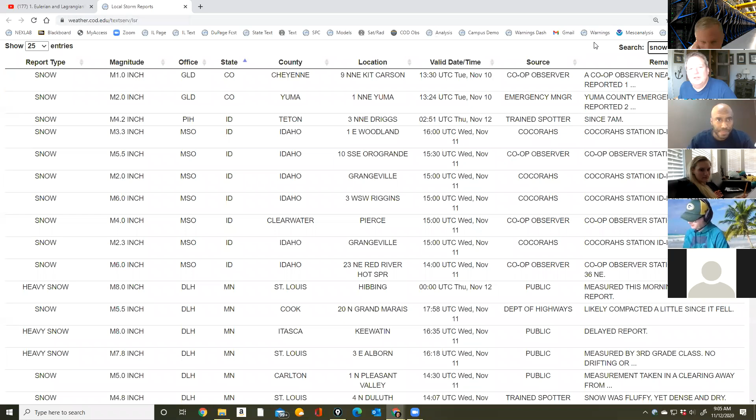Before I get into this, I wanted to show you something Mike Zaransky just did. This is the coolest thing ever - it's called local storm reports. Mike has recreated this page.

Let me show you. He's recreated this page - you know how we have a warnings page that looks like this? Have you seen that one? Yeah, this one is a local storm report. So instead of always going through the weather service to get local storm reports, now we have local storm reports in real time.

So we can actually monitor this page and watch what reports are coming in. Here I've got non-thunderstorm wind gusts, snow, flood, heavy rain - these are all LSRs, tropical storm. I saw one I didn't even know existed.

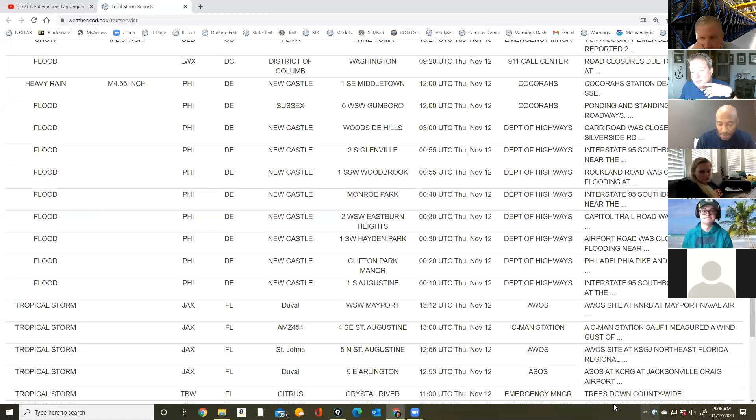So the page will auto update? It updates every 2 minutes - storm surge, tropical storm. There's one, let me look for it, and then you can search it.

So if I need to find debris flow - there's a debris flow warning coming out of Puerto Rico, I guess, and Virginia. Yeah, I've not seen that one before. I didn't even know they had that.

But let's say I wanted to see what happened in Illinois the other day. I go to Illinois, and we have it ordered - we can arrange it by state. So we can see thunderstorm wind gusts, 61, 66, 64.

That's all Cook County. So if I said, well, let's see what's going on in DuPage County - let's see what they had. As soon as you type in the search bar, it'll tell you, okay, we had 4 severe thunderstorm reports: Woodridge, York Center, Carol Stream, DuPage Airport.

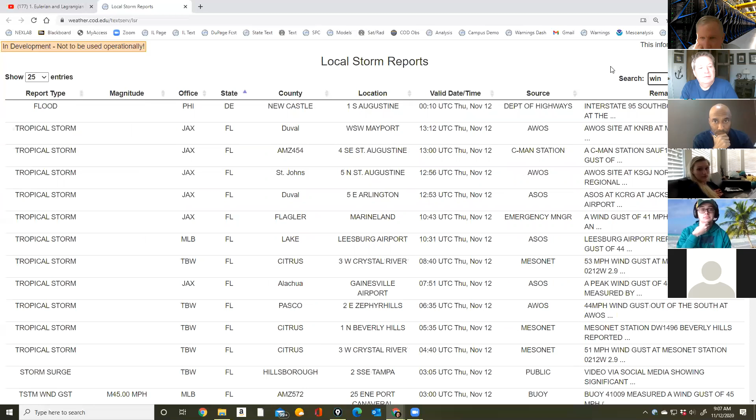Come on, don't tell me that's not cool. It's cool, it is nice. Winnebago County - that's actually really cool. I'm telling you, this is what we've wanted for so long, and Mike finally was able to do this. So we have some amazing stuff with this.

So if I wanted to see tornado reports, rather than going to SPC to see the dots - and we can create an image with these things in there as well eventually - but if I wanted to see tornado reports that have come in recently, Davenport office had a bunch. It looks like it's all the same tornado, but they did have a tornado.

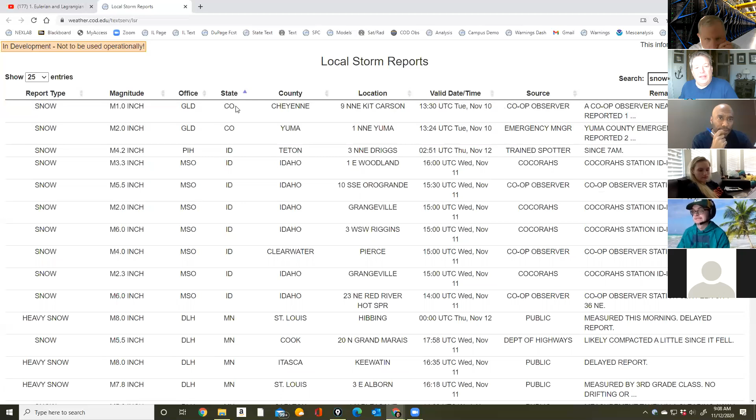This would have been in Mercer and Rock Island County. So there it is. But if you say, oh, I want to measure snowfall, let's say we're doing it for Illinois - I can do it by state. Okay, here's Idaho. So then you're looking at this, and you will always see snowfall reports coming in by state. And we would do the same thing for Illinois.

So if you want to monitor reports, rather than going to our text page where we have to search every single text product and go, what's that say? Oh, that's not the one - that has driven me crazy for years. And now it's all gone.

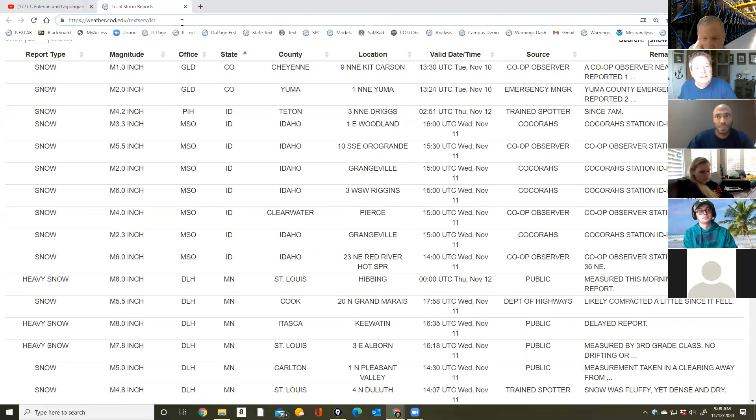So if you want to write this down, I can share it with you. Are these the same reports that go down to SPC or show up on SPC's page? Yeah, these are - let me show you. I'll give you this. And if instead of LSR, you do SVR, then you get the same stuff that we have with just severe thunderstorm and tornado warnings.

And I think we have one where we include floods and any warnings currently going on. So we have a lot of these pages that are great ways to monitor. We're just waiting to get it done - it's taking a long time to fix things.

So, let's see, what else did I want to show you?

On the text page, the way you did it before, Jim, is you'd go to the National Weather Service forecast pages, go to information, and then local storm report.

Sometimes they'll come up with this page where they summarize it, but it's fairly random. Most of the time, at the bottom of this... no, hold on, this isn't working quite right.

If I went to local storm reports, then at the bottom of the page, you'd see 'go to previous bulletins.' They would come out with one report and you're like, okay, that's not it. You'd have to search each text product to try to find where it is.

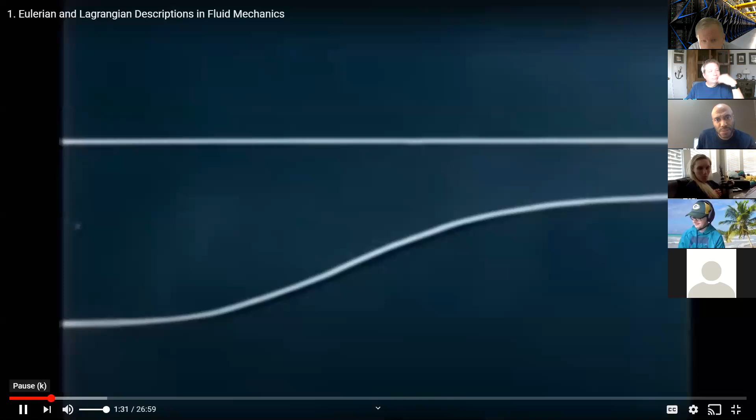So in here, what's going on is you've got deformation, right? This is deforming the fluid. So they start as little squares as the fluid must go into this smaller tube. Okay, so we're not going to worry about the deformation of it.

So instead of using squares, what are we going to have to use? What will be necessary? Vectors? Well, we'll use vectors, but you have to consider it as points.

In this flow of water through a contraction, hydrogen bubbles have been used to identify pieces of fluid so that we can follow their motions. These pieces are quite large, however, and we would like to examine the motion of very small, infinitesimal bits of fluid. Therefore, it will be more convenient.

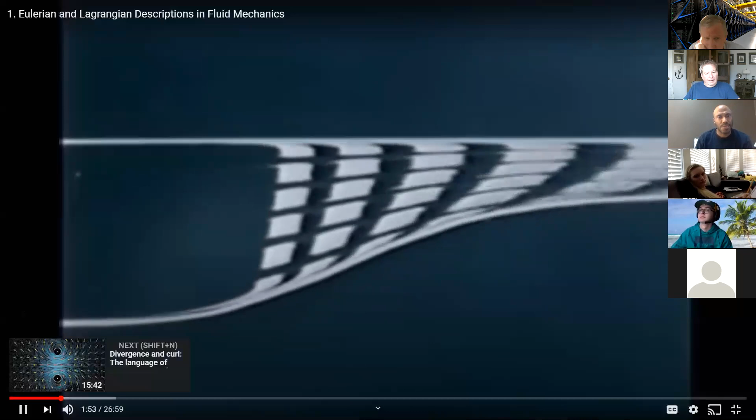One thing to keep in mind too is, do you see the shape of this square? It actually is doing something like this. It looks like that. What is this? What does this illustrate? It does the same thing up here.

What is that deformation a result of? Oh, viscosity. Right? It's viscosity. That's what's happening. So you have incredible amounts.

If you looked at a zoomed in area, you'd have incredible amounts of what? What does viscosity result in? Stretching? Well, it does a little bit, but what is it resulting in here?

Shearing? What does this illustrate? Over here, it's shear, right? So viscosity creates shear.

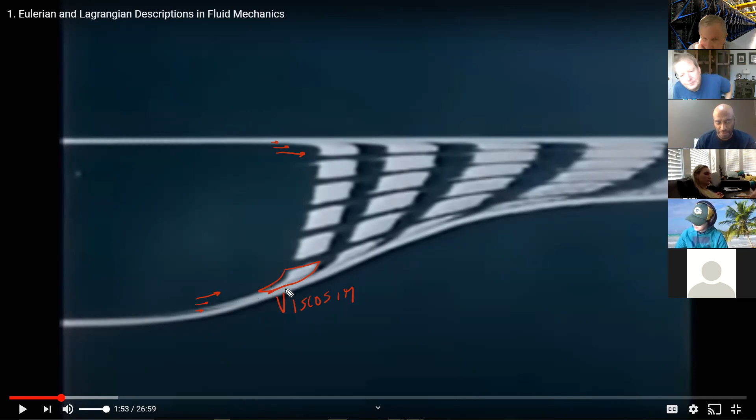Shear results in what? Vorticity? Vorticity, right? So if you think about what's going on in the surface boundary layer, you are talking about huge amounts of vorticity that's generated.

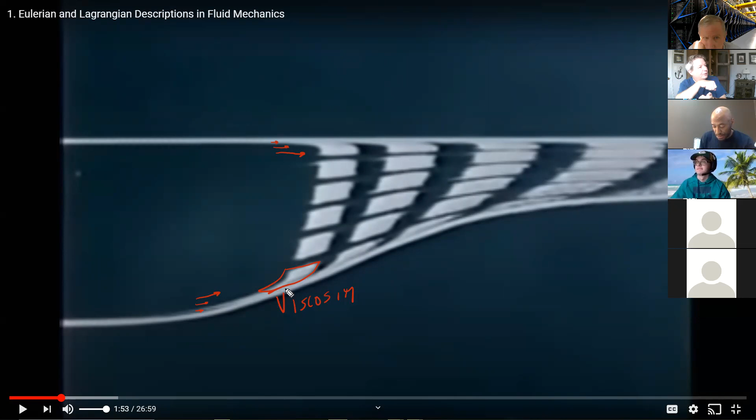So whenever you watch leaves flowing, you'll see these swirling leaves. That's all because of viscosity due to the boundary layer. So I just wanted to point out some of the things that you should note about life in general.

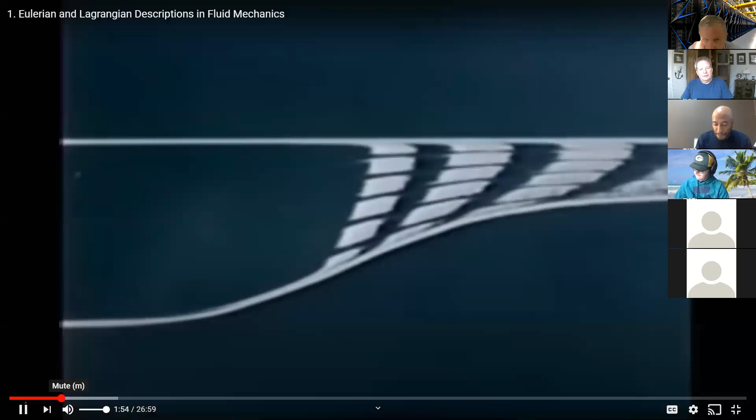Describe the motion itself. The description of motion is more convenient to have a computer simulate these motions and generate the visual displays for us. We will use open circles to identify material points.

Now let's think about this. What was the word he just used for these open circles? He called them material points. If something at this point changes over time, then we would write it this way, because it's a material point - it becomes a total derivative. And it's a total derivative, meaning it's following a point. That's where we get this idea of Lagrangian.

Following the parcel - this time it's a point. They will use closed circles for the local derivative, right? Which they call... what do they call that? They call it a laboratory point. That's the word I'm looking for. Laboratory point - it's fixed in space. And so here we would use d-something, d-time.

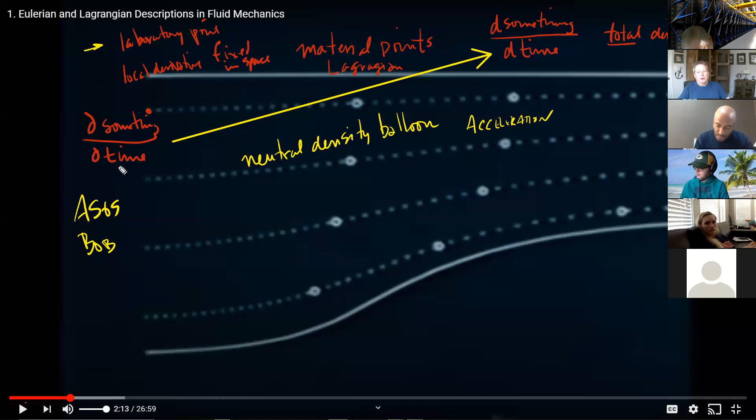So we are going to measure everything in laboratory points. And what really matters is the parcel has to have forces - it's the parcel's change that matters. Because if there's pressure or a force on the parcel, do you agree that's going to cause an acceleration? And that acceleration is going to move the parcel in different directions. So I need to know how to get this, but this is what I measure. Does that make sense? I measure the laboratory points, but I need the information from the material point.

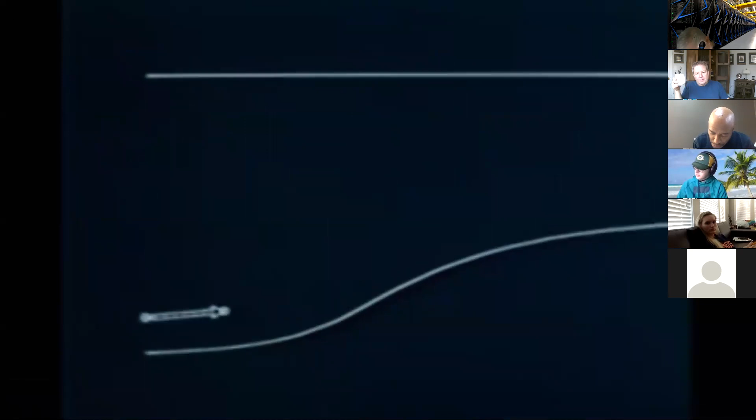And that's what this movie is all about - describing the position of a material point as a function of time, using a vector drawn from some arbitrary initial location to indicate the displacement. Do you understand what they've done here? This is an open vector. This open vector is actually the material point's vector. The only difference is, where are we placing that vector?

We're placing it at a fixed point. So this open vector is the force or the velocity or whatever vector is associated with a material point, but placed at a fixed point.

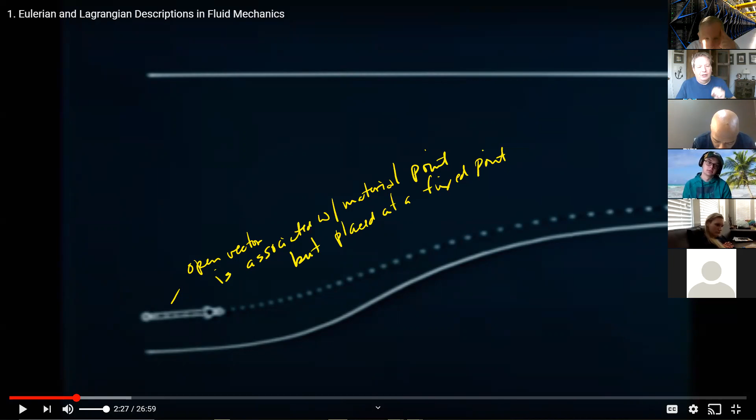Does that make sense, guys? Do you understand what I'm saying here? Yes or no? Because that's the instantaneous measurement, right? It's the measurement of the actual point, not the location - I'm just putting that vector at the location. So watch what's going to happen at this point.

We will use open vectors, as here, to indicate velocity and displacement relating to material points. In a given motion, we can compute the velocity and acceleration of such a point at each instant. Here we indicate the velocity by a vector attached to the point. In a continuous fluid, we have an infinity of mass points, and we have to find some way of tagging them for identification. A convenient way, though not the only one, is to pick some arbitrary reference time, which we call the initial time, and identify the material point by its location at that time.

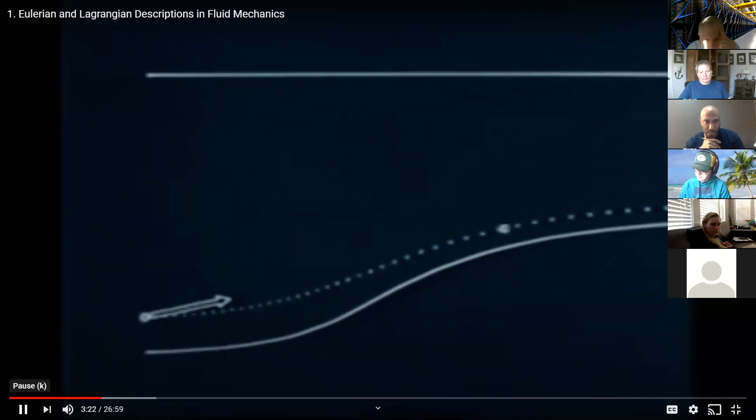Mathematically, we would say that the velocity is a function of initial position and time. So that's the open vector following that point, displayed at a fixed point. To accord with this description, we have shown the vector attached to the initial position. We could show the vector attached to the moving point, or use both.

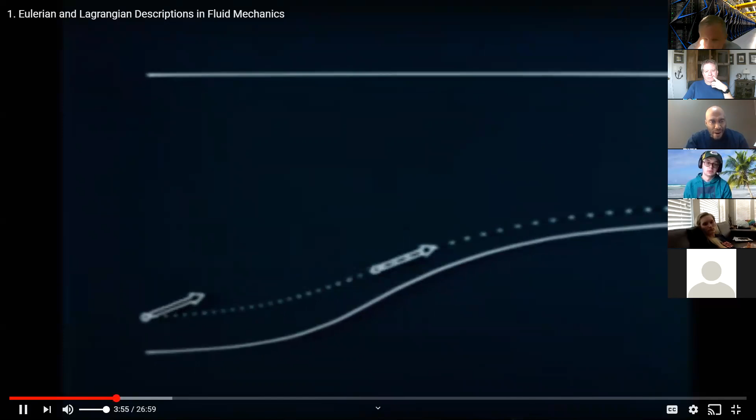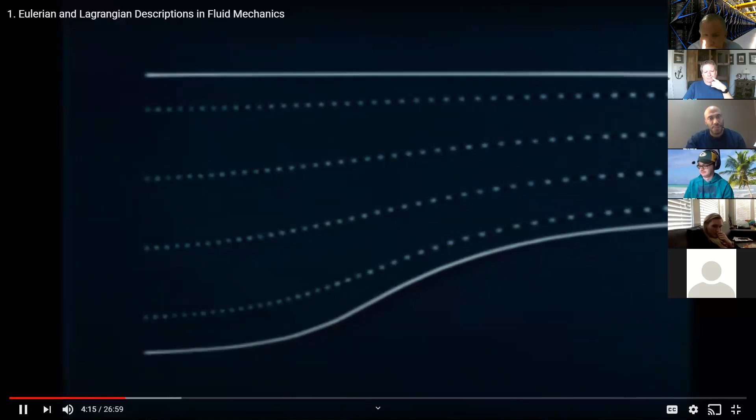If we were displaying the motion of a group of points like this, whose vectors do not interfere with one another, to display the whole motion, and in more complicated situations, we avoid interference by showing the vector only at the initial location. To describe the whole motion, we would have to give the velocity of all the pieces of matter in the flow as a function of time and initial position, like this.

Okay, does that make sense? Do you understand what they're doing? Now, I've seen this so many times, it makes more sense the more that you watch it. But I'm just showing you all the different points, because how many points exist in here? Infinite. An infinite number of points. And I'm just choosing some of them and representing a vector of what that point does later.

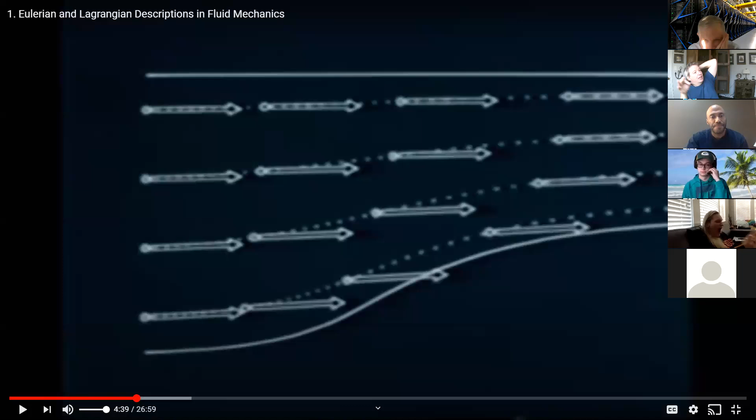So he says the velocity is a function of its initial location and time. Make sense? Because where it is, these arrows are not all the same because the initial velocity was different when I started this thing.

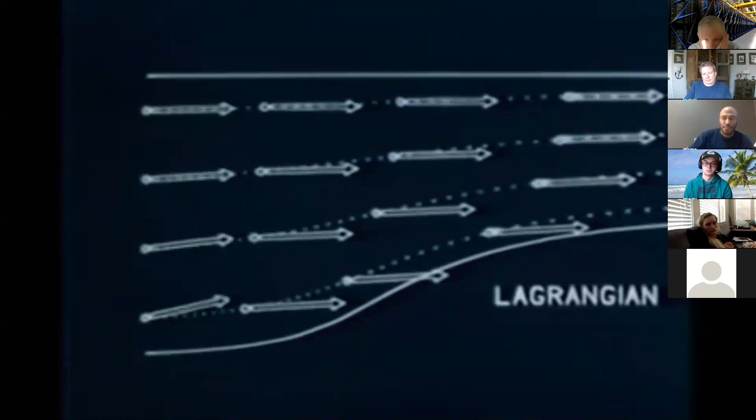This description in terms of material points is called a Lagrangian description of the flow. Such coordinates are called Lagrangian or sometimes material coordinates. From the Lagrangian velocity field, we can easily calculate the Lagrangian displacement and acceleration field. We can imagine attaching an instrument, like a pressure gauge, to a moving point to make what we might call a Lagrangian measurement.

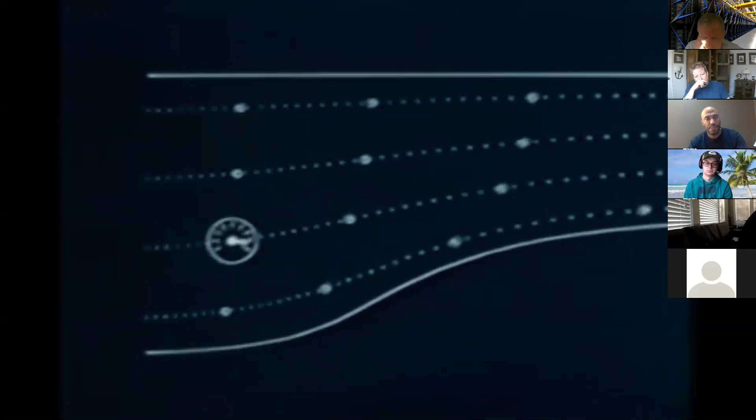This sort of thing is attempted in the atmosphere with balloons of neutral buoyancy. If the balloon does indeed move faithfully with the air, it gives the Lagrangian displacement. Lagrangian measurements are actually very difficult, particularly in the laboratory.

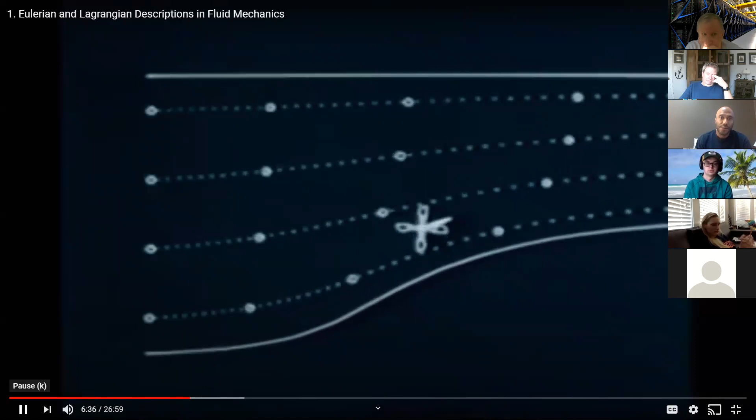We usually prefer to make measurements at points fixed in laboratory coordinates. Classically, the idea of a field, such as an electric, magnetic, or temperature field, is defined by how the response of a test body or probe, like this anemometer, varies with time at each point in some coordinate system. Here we are probing in laboratory coordinates. We will always indicate such probing points, points in a coordinate system fixed in our laboratory, and the velocities measured there by solid points and solid arrows.

Okay, you guys follow that? But I didn't quite hear all of it because of the weird distortion from watching it through a screen share. Oh, okay. How about the rest of you? Were you able to hear most of that?

Yes. Okay. So all he's saying is that we now have laboratory points, right? So in meteorology, what do we say? The world is our laboratory because we're dealing with the entire atmosphere. And we put sensors every place in that laboratory. And that's the words that they're using to describe the fact that we're taking measurements at fixed points.

All right. Now let's get into the math of it all. Here is a grid of points fixed in space. We show the velocity at each point. By the way, a gridded laboratory fixed in space. Anybody want to tell me what we are describing here? A gridded laboratory?

Model. That's a numerical model, isn't it? We collect data. We do something called an objective analysis. We find ways of taking data points and assigning it to a grid. That is an initialization of a grid. And there's a lot of research, there's a lot of stuff you would do in modeling that talks about how that happens. But you're basically saying, I'm going to take these temperatures and I'm going to assign it to a grid. And there's methods to do that.

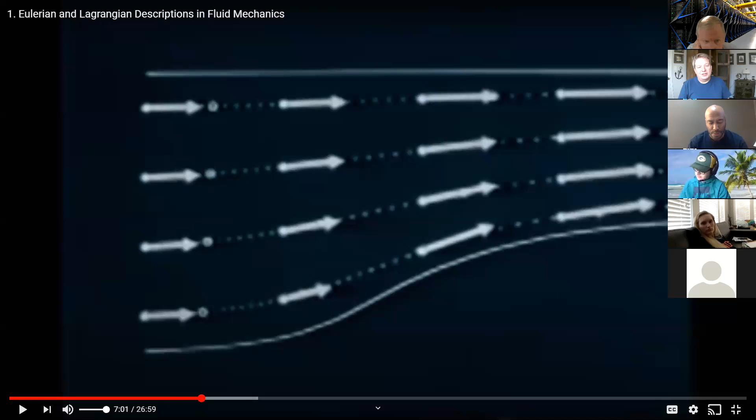Would you agree that all modeling has an initial error because it's not exactly precise? We don't have extreme precision in doing this, therefore we have an initial error. Chaos theory says eventually that error will take over and the atmosphere becomes non-predictable. If we ran the NAM with a perfect grid, with perfect precision, we'd have a much better model, but we don't do that. That would be a really interesting way, if we could put a grid equally spaced everywhere of exact precision. I wonder if our models would get better.

A description like this, which gives the spatial velocity distribution seen by a probe in laboratory coordinates, is called an Eulerian description of the flow.

Notice that the white arrows are not moving over time, even though the fluid is moving, and this arrow is exactly what the fluid is at that point. So the question I'd ask you, before we show this: what would cause this arrow to change at that point? Do you guys understand what I'm saying?

Here we're watching this simulation. All these particles are moving through this tube, all of this stuff is moving through this funneling tube. The parcels, or the little particles, are going to accelerate as they go into a narrower tube. You take a hose, you squeeze the hose, it's going to go faster. So what we're saying is that there's an acceleration of each individual parcel.

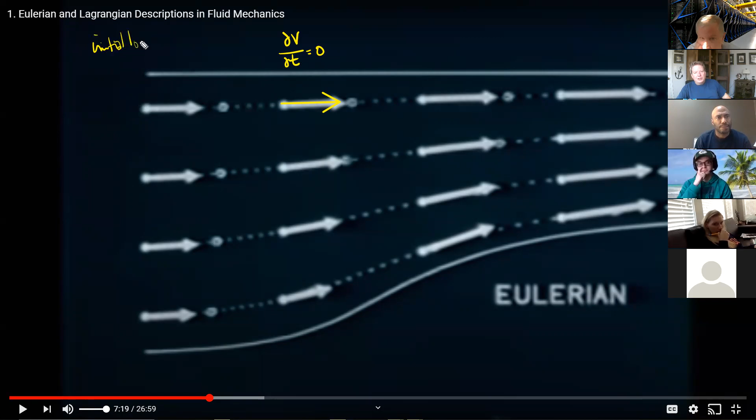What is this a function of? The initial location and velocity, right? We are starting the parcels here with an initial velocity. Well, what if something changes in the initial condition, won't that change this one? Yeah, so that means from here to here, there would be a change if the velocity changed over a distance. So if I had some change in velocity over a distance, what do we call this? Acceleration? Well, yes, but what do you call anything, a change in anything over a distance? Gradient. Okay, if there's a gradient, then these things will change.

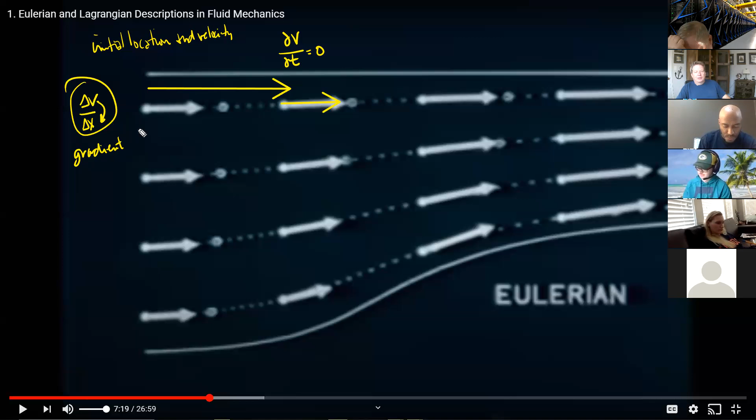Keep that in mind. But do you see now that I have a spatial term instead of just a temporal term? I want to make sure you know these words. This is going to be X, Y, Z. This is going to be T. Those are your four independent variables.

Although the physical field is the same, the Eulerian and Lagrangian representations are not the same, because the velocity at a point in laboratory coordinates does not always refer to the same piece of matter. Different material points are continually streaming through the same laboratory point. The velocity that a fixed probe would see is the velocity of the material point that is passing through the laboratory point at that instant. Does that make sense? I think that should.

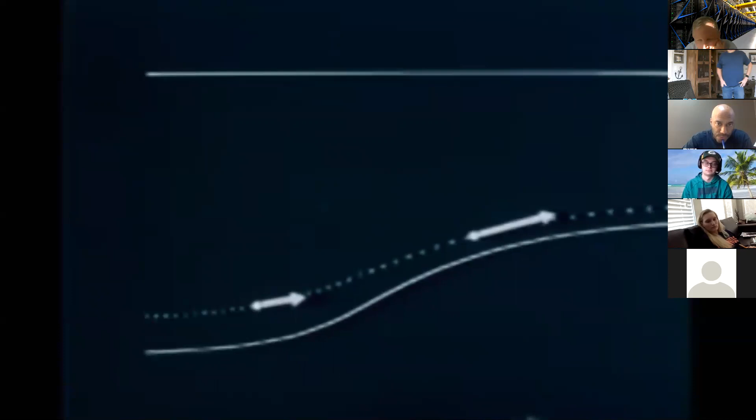It's an advantage of the laboratory coordinates that there's often a frame of reference in which the Eulerian field is steady. Just as we simulated the flow in the contraction, we can simulate the flow under a free surface gravity wave like this. To make things clearer, we have rather exaggerated the wave amplitude. Let's take a closer look.

Let's stop for a second. I have a gravity wave, it's just a wave. Now do you remember what a wave is? What does a wave do? Let's put it that way. What does a wave do? It has frequency and amplitude. What does it do? It oscillates. Yes, but a wave transfers energy. What does it not do?

What does a wave not do? It doesn't transfer mass. It transfers energy from here to there, but it doesn't transfer mass.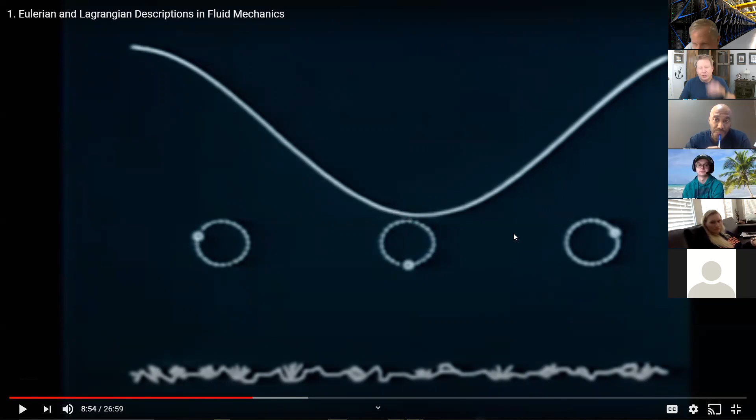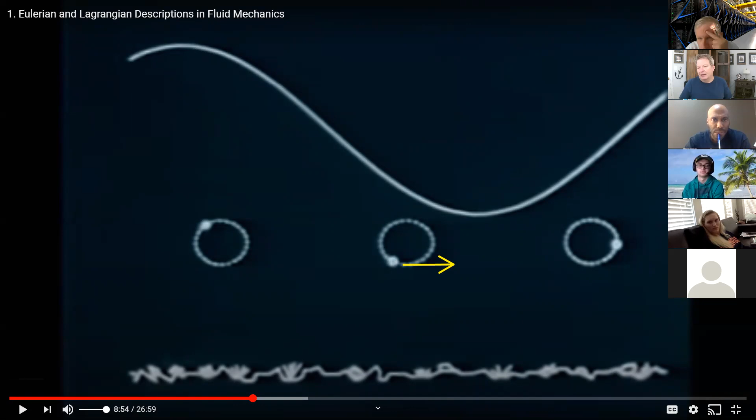So what causes a vector, or what causes this parcel to move that way? Why would this parcel move that way? The parcel is not moving that way right now, but let's say any parcel, any dot.

Here are the velocities of the moving point. Let's go back a little. What would cause a parcel moving back and forth? If a parcel starts moving this way, why does it go in a circle and start coming back, given this configuration?

Because the wave is at maximum amplitude. And what am I measuring? What do you call the weight of the water above you? Water pressure. And the weight of the water here? Do you agree there's greater pressure there than here? So which way is the force pointing? That direction. So the parcel's moving that way, but there's a force slowing it down.

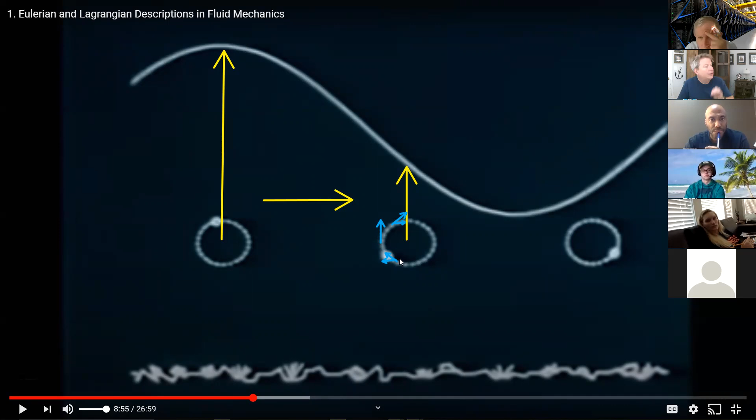Now what is the velocity of this parcel? It's neither left nor right, it's tangent to the circle. What is the velocity here? Tangent to the circle. Do you agree there's a component this way, and over here a component that way? So there's an oscillation horizontally, and the same is true with the vertical gradient, so we make these little circles.

That's kind of what's going on. Now if you were doing that in a deep water wave, it will have bigger circles up top and smaller circles down below. If you go into the tsunami met-ed material, they show you these particle motions. When a tsunami comes on shore, the motion gets stretched, so this circle instead of being a circle gets stretched, and that's why water flows onto land and then comes off land. It's making these circles that get squished, and now they accelerate horizontally, really long.

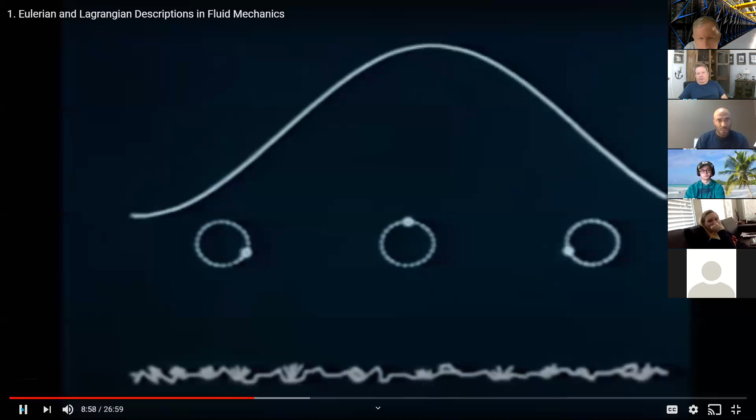Anyway, I just wanted to point that out because I think it's interesting. Here are the velocities of the moving points, the Lagrangian velocities attached to the points, and here also attached to their initial locations. In any flow, the Lagrangian field can only be steady if each material point always experiences the same velocity. This degenerate case only happens in a steady parallel flow. Here now is the Eulerian description. In this wave motion, neither the Eulerian nor the Lagrangian description is steady, in fact they have an identical appearance.

Isn't that cool? In this flow, if we move our frame with the wave speed, the Eulerian pattern will become stationary. Let's do this, and this is indicated by the translation velocity shown as an arrow at the bottom.

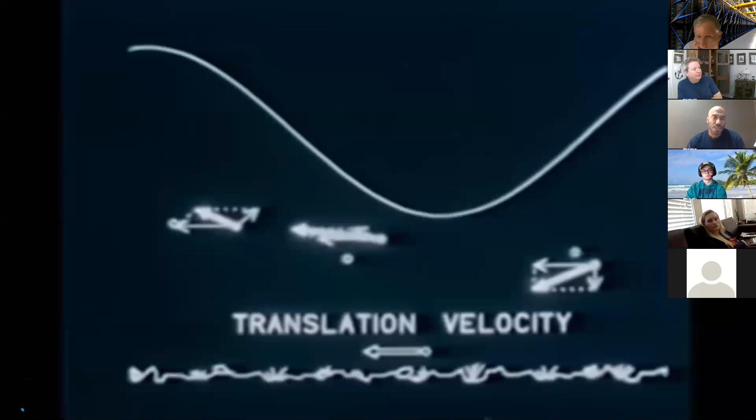Do you remember, where am I? Do you remember back in 11:15 when we drew circular motion with translation? Instead of circles, if we translate faster, it never goes back on itself, so we get a wave pattern. That's what those parcels are actually doing—they're traveling in waves.

So when I translate, this is a big translation, much larger than the little vector showing the circle. You don't see a circle, it doesn't back up on itself, and you get a wave pattern.

If I were to make this arrow smaller than this arrow, what would happen? Well, what would the shape of this parcel be? You remember what we did in 11:15? It makes little spirals.

And doesn't a tornado rotate faster than it translates usually? Not always. When we had our QLCS this summer, we probably did not have rotation that exceeded the translation, which made it much more difficult to find damage, because the damage would not have gone east in one direction and west in the other. It would have all gone east, but we saw some damage going north and some going south—north-south oscillation, but not east and backing up. And we actually did see that.

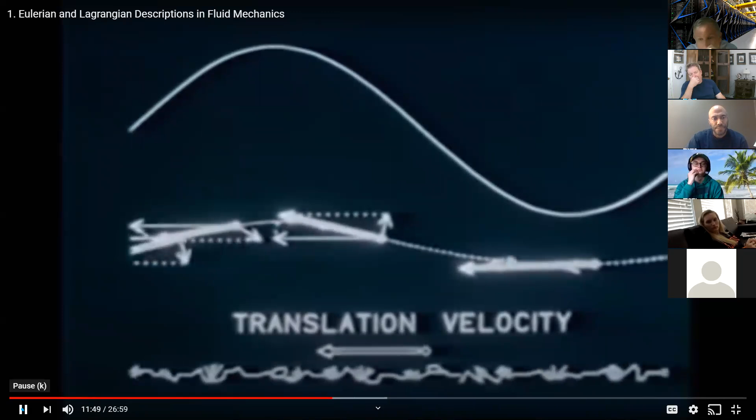As a material point passes through each laboratory point, its velocity is instantaneously the same as that of the laboratory point. It is partly this possibility of eliminating one of the variables in the analysis, time, that makes the Eulerian representation more attractive.

Most laws of nature are more simply stated in terms of properties associated with material elements—Lagrangian quantities. But it's nearly always much easier mathematically, when describing a continuum, to deal with these laws in laboratory coordinates. Thus, to write our conservation equations, we have to talk about transforming from one set of coordinates to the other.

Let's talk first about the relation between... hold on.

So—path line, so—did you notice he was way off on his mouth and the audio gets way off? So somebody went in there and actually did an audio fix of this stuff. So I should put this one out. This is better.

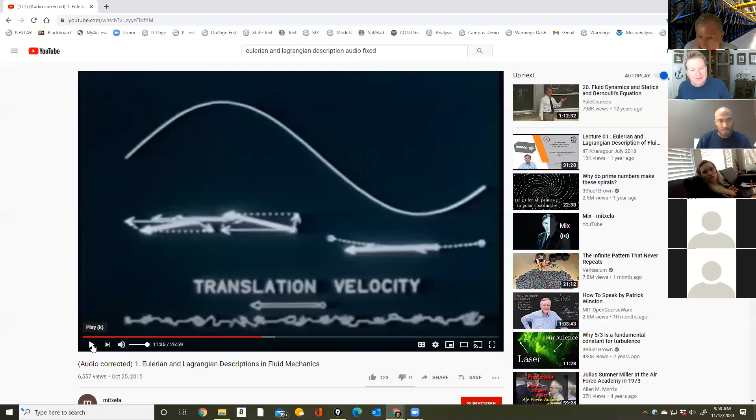Streamlines in this frame of reference, since the flow is steady, resemble a form of the free surface. When describing a continuum, we deal with these laws in laboratory coordinates. Thus, to write our conservation equations, we have to talk about transforming from one set of coordinates to the other. Let's talk first about the relation between time derivatives in a scalar field.

Let us imagine a river. Now they're going to show you the first example, which is a time derivative of a scalar field. They're going to talk about a concentration of a radioactive tracer, using R. We could easily, and maybe I should, call it T, so we could use it as temperature. So which would you rather use, temperature or R the way they have it? Temperature. Let's try temperature, which a radioactive tracer has been distributed.

Since we're interested in local changes, let us look at an infinitesimal part of this river. I'm zooming in into just a part of the river. Let us imagine that the tracer is suddenly and uniformly distributed in the river. And so, well, I think I will use R just because it's kind of cool. So what did they just show in the last few seconds here?

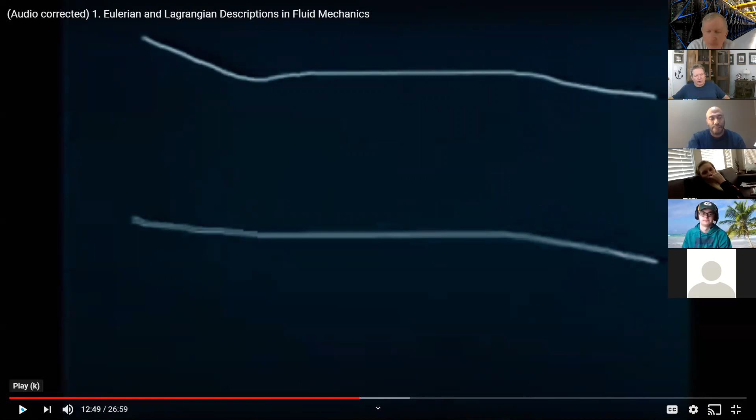The tracer being uniformly discharged throughout the water. It's uniformly distributed, but what happens to the radioactivity? Now let us imagine in this picture that the tracer is suddenly and uniformly distributed in the river.

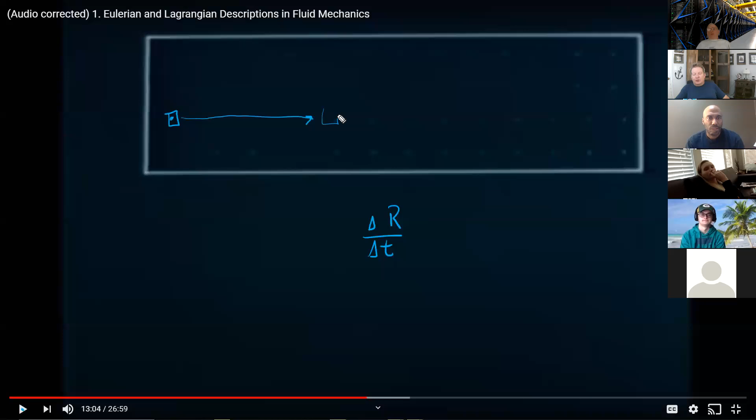It looks like it's shaking, but I can't tell if that's... No, you see how it's fading? Yeah, so what's happening is the radioactivity of this thing is changing over time. Where is it changing? Everywhere. So if I had a parcel here, the radiation in that parcel, shown by the big dot, as the parcel goes, the parcel will get fainter until it eventually fades out to nothing.

So it's a negative quantity. But do you agree that I could say that of the parcel, the radiation, the radioactivity level in that parcel fades over time? So the change is less than zero, so it's negative. But you could also say that at a single point in time, it starts fading also. So what would that single point in time be? Delta R over delta T. No, not delta, partial. Partial R over partial T.

And that would be zero. So in this case, partial R and the total derivative R are the same. But that's because it's uniformly nothing, I mean, it's all the same.

Now, I want you to think about this for a second. When we used the derivative in class, let's say that we did this, we said it's going to be equal to dT/dt minus that — this is the advection term. Remember we did this in class? So if I, and again, in 3 dimensions it would be u dT/dx plus v dT/dy plus w dT/dz. That's what it is. This is a dot product, so it's a scalar quantity.

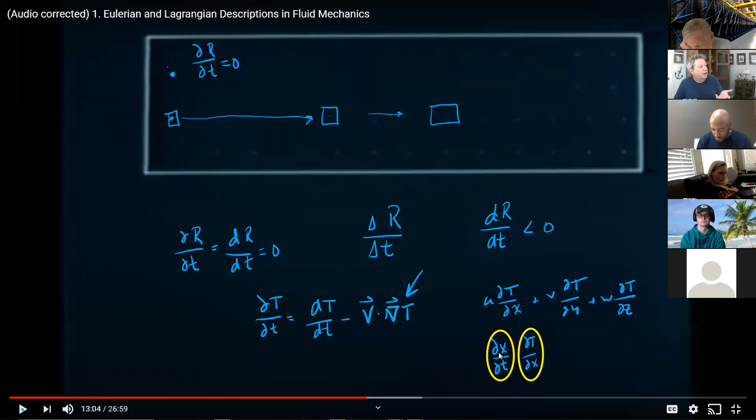But in this case, is there a gradient in the radiation? No, they're all the same. I uniformly distributed the radiation over the course of time.

These dots that are gradually disappearing symbolize the tracer, which is gradually decaying everywhere. These filled-in circles represent 2 laboratory points, which are infinitesimally close together on the same streamline, but which look far apart in our expanded view of the river.

It's, how close are these together? Infinitely close. So what's the distance? Zero. No, the dx, I guess. Right, they're dx distance. That dx is infinitely small. Does that make sense to you? They look far apart, he said, but they're not — they're infinitely close together because we're using derivatives.

Since in this case we distributed the tracer uniformly, the radioactivity at the 2 laboratory points is the same, but is changing with time. We can add radiation counters at the laboratory points, that's just how much radiation. The solid bars on these Eulerian radiation counters indicate the level of radioactivity at these 2 laboratory points.

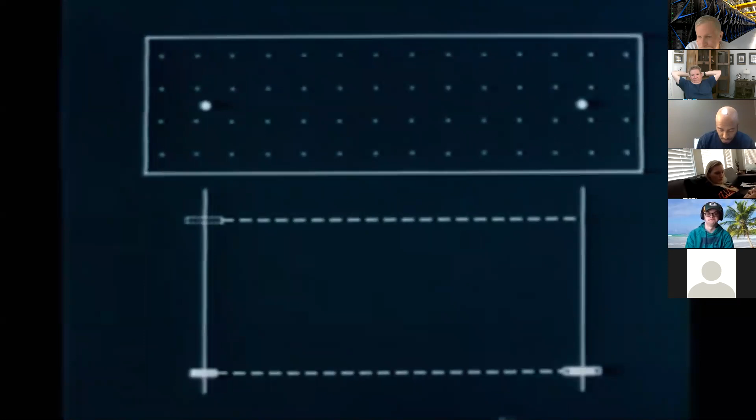Comparing the before and after values of the Lagrangian counter, it is evident that the traveling points see only the same change that each of the laboratory points sees.

This can be written as the time difference multiplied by the rate of change with time. So delta T is the time change times the way that the radiation changes over time. This is happening at this point.

This is a partial derivative, therefore it's the Eulerian description here. So all I'm saying is that it changes by, let's say—what do they call the amount of radiation? What's the unit? Curies. Curies, yeah.

So it says it's going to change by 2 curies per second, times 3 seconds. How many curies did it go down? 6. Right, that makes sense. That's the total change. So this equals that.

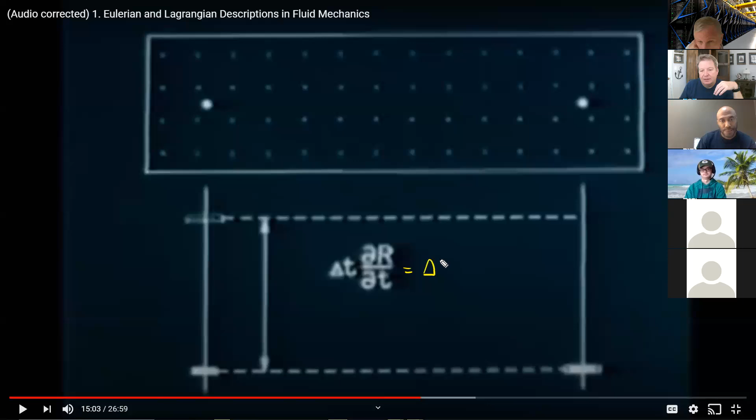The rate of change times the time is equal to the total change. Does that make sense? I think this should be. That makes sense, I think.

Suppose now, however, that the tracer is not uniformly distributed in the river, but that the intensity is greater upstream. Would you agree there's a gradient? Yep.

Now the intensity at the downstream point is initially lower, and of course both are decreasing with time as before. So the partial of R with respect to time is equal everywhere. Just as before, the only change experienced by the material point is due to decay.

The change seen at a laboratory point is not, however, since new material of originally higher intensity is being swept past. To express the change experienced by... Do you understand what he said there?

The parcel experiences the same decay that it did before. It's decaying delta T times the rate of decay. That's of the parcel. But the point, which would experience the same thing, is being fed by higher radiation coming into it. Okay, so think about temperature.

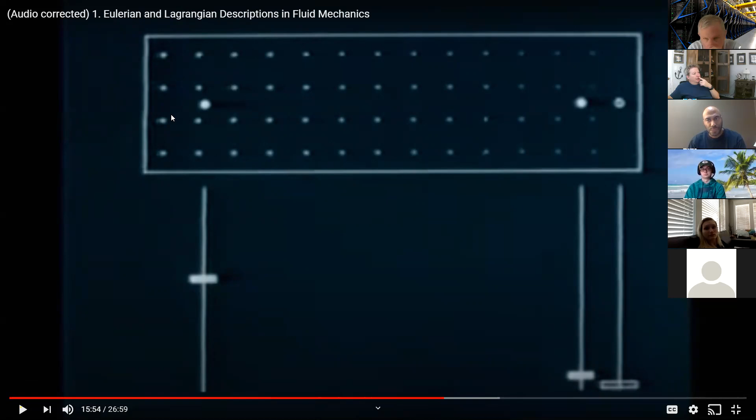So what do we call that? You're muted. What do we call that? Advection? That's advection. We are advecting material in.

Point in Eulerian variables, we need two terms: the change of intensity with time at a fixed point, and the intensity difference between laboratory points at a fixed time. The total change when the material point has reached the right-hand laboratory point is given by the difference in level between the dash counter on the left and the Lagrangian counter.

The change with time experienced by either laboratory point is given by the difference in level between the dash counter and the Eulerian counter on the left.

Okay, that's a lot of words. You'll see what it means in a second. It can be written as before, as the time difference multiplied by the rate of change with time. Right? That's still at the point. This is still the rate of change with time times the time.

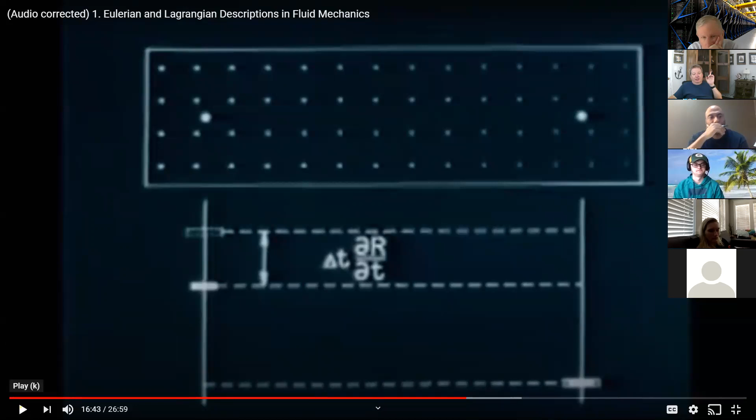It's not the same as the big one because the rate of change is going to be different. Let's continue. The change due to the intensity difference between the laboratory points at any time is indicated by the difference in level between the two Eulerian counters, and can be written as the distance traveled multiplied by the spatial gradient in the direction traveled.

Okay, so just like this is a time derivative times the total time, this is a spatial derivative. We could use the word zonal derivative, times the distance traveled in the zonal direction, in the east-west direction.

The distance traveled can be written as the time difference multiplied by the magnitude of the velocity. So now they're replacing this delta x with delta t times u, the velocity.

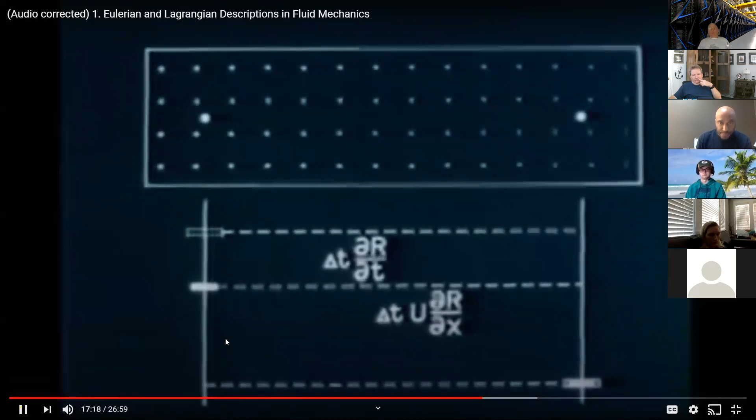The total change is the sum of the two changes described.

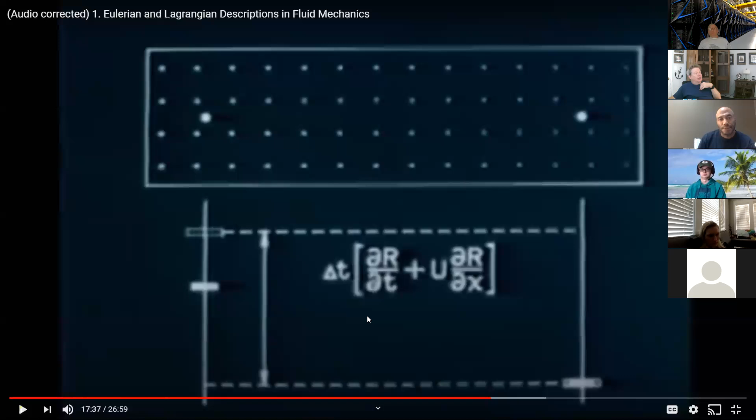The material or substantial derivative is the name given to the expression multiplying the time difference. So that's the material. And here they throw in a third word, the substantial. We've been calling it the total, which I like. So the total change is a result of this temporal change and the spatial gradient times the velocity, which is an advection.

This is simply the rate of change with respect to time seen by the material point as it passes the laboratory point, expressed in laboratory coordinates.

Since this derivative operator occurs in every Eulerian conservation equation, we give it a symbol in fluid mechanics, using capital D's to emphasize that the material derivative is the rate of change seen by a material point.

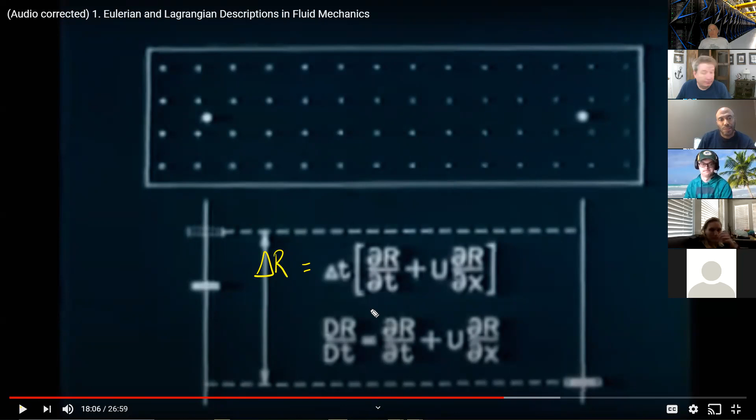Okay, so what they're doing here is this. Let me get my pen. They are saying that this equation is equal to the total R. Then they divide both sides.

They get rid of this term and bring it over here. So they're saying, how much does the radiation change in a given amount of time for the parcel that moves across? So instead of using lowercase d, they now use capital D, which is known as the total derivative.

But we've been using d/dt. I'm not sure why it went from this to this other notation. I don't know where that came from. Maybe that happened since this movie was made. I don't know, all I'm saying is that this is d/dt.

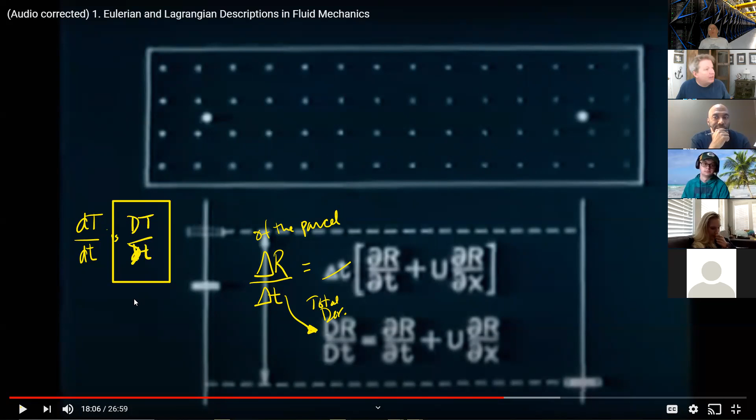So whenever you see this D, you can think of it as d/dt. In my class, they use the big D when talking about the Lagrangian, just so they can differentiate between the two, but it's sloppy notation. Anytime you see this D or that d, if it were my world, I would want to use the capital D consistently. I don't think the textbook does. But this makes sense, that total derivative is set up by the partial derivative.

This becomes confusing. I think mathematicians are sloppy and we interchange things too often, and that's a problem. So you have to realize what is going on.

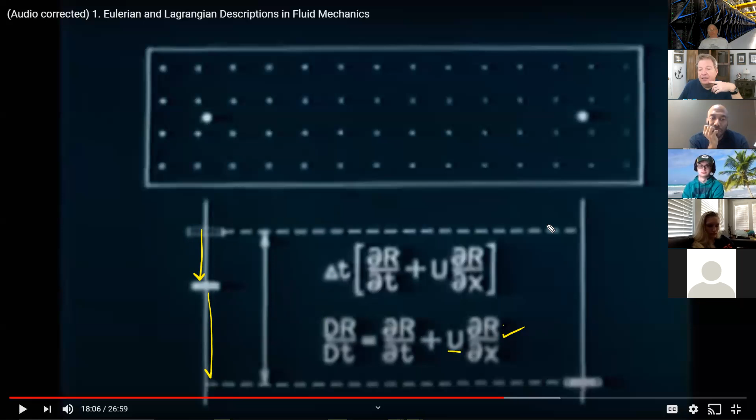So when I look at this thing here, I'm saying the total change that a parcel will experience is a result of what is happening over time, and that's this term showing you the decay, plus the spatial change, which is over here. And since it's the velocity times a gradient, velocity times a gradient is advection.

And you better know that, it needs to be your second nature. Velocity times a gradient is advection. Actually, velocity times anything is advection. But in this case, if I really want to specify, that's advection of a scalar quantity.

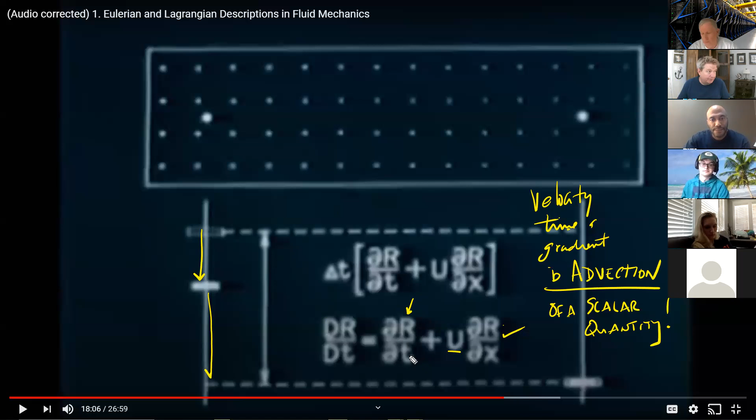Can you get advection of a vector quantity? And the answer should be yes. Because what is this term, folks? Do you agree that's a scalar term? So I need a scalar term here. If instead of this we use a velocity vector, then this has to be a vector.

As it passes a laboratory point, but expressed in laboratory coordinates. In vector notation, the velocity times the gradient in its direction can be written as the scalar product of velocity and the gradient.

Okay, hold on. So I'm multiplying by the velocity vector, but since I'm doing a dot product, it's basically this: I could take U, three-dimensional, times del, times the scalar quantity. And I would draw it this way.

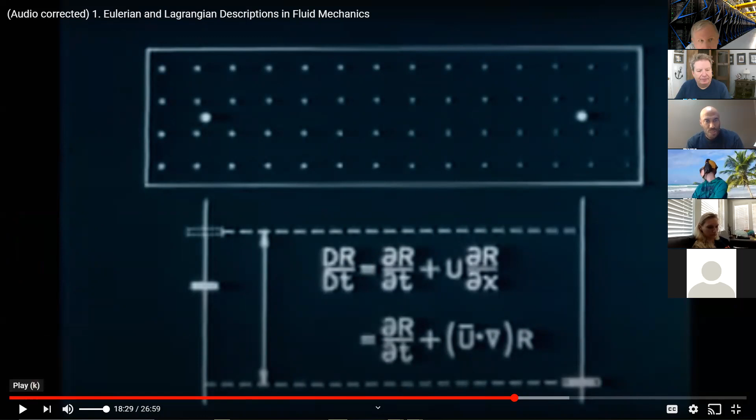They put parentheses around it, which doesn't really matter. They don't put a vector symbol on this del. I'm not sure why, unless they just assume the del is a vector. I think it's implied, yeah. They may just say del is a vector.

We're also interested in the material derivative of a vector field, such as the velocity. We're especially interested in that because the material derivative of the velocity gives an expression for the acceleration in a form which we need for the momentum equation. The expression we just obtained for the material derivative of a scalar field would work just as well for each component of a vector field. But we can also show the material derivative of the vector field directly.

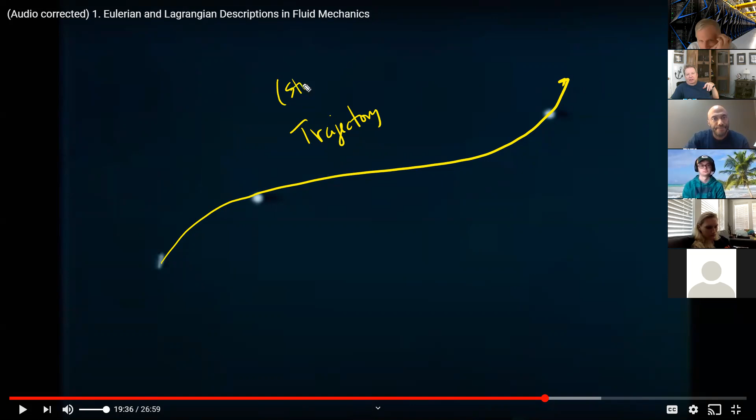If it's not changing over time, so that all parcels go on that same path, then it could also be a streamline if it's steady state - in other words, if that streamline doesn't change over the course of time. Then the streamlines and trajectories are the same if they're not changing.

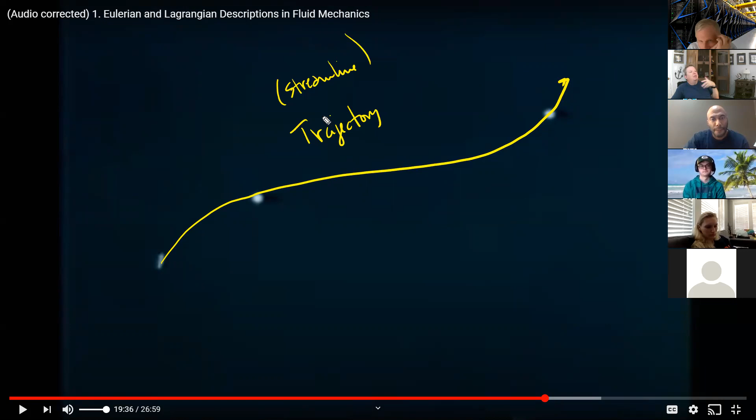Attached to it. Clearly, although the flow is steady in the laboratory frame, the moving material point experiences change as it travels, so it moves to regions where the steady velocity is different. The total change will be the difference between the velocities at the two laboratory points, indicated by the solid Eulerian vectors.

So in here, these solid vectors - the amount of the change will be easier to see. These solid vectors are the steady state laboratory point velocity. So I have a velocity at the left point, a velocity at the right point, and they stay the same - they're different. So the parcel has to go from this velocity to that velocity. Now it's a change in a vector.

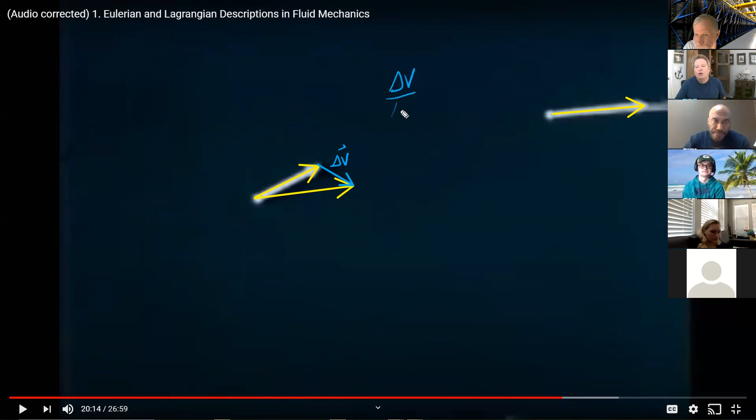So in this example, we're going to have a vector here, and then this vector here will be put down here. So the vector change is this - connect the head of one to the head of the other. That is a change in the vector, that's how the velocity is changing. And it is the change in the velocity over time that defines an acceleration. Okay, so keep in mind that's how you do vector differencing.

We attach the Lagrangian vector to the left-hand laboratory point, taking as our initial or tagging time the time when the material point passes that laboratory point. So we start it here. The difference between the Eulerian vector and the Lagrangian vector at the left-hand point gives at each instant the change that the material point has experienced.

The total change when it arrives at the right-hand point, a vector distance delta r away after a time delta t, can be written as the vector distance traveled times the gradient of the velocity. The distance traveled is just the velocity times the time difference. So what does this say? Well, let's go back just a little bit. When it arrives at the right-hand point, a vector distance delta r away after a time delta t, can be written as the vector distance delta r away - that's a distance traveled times the gradient of the velocity.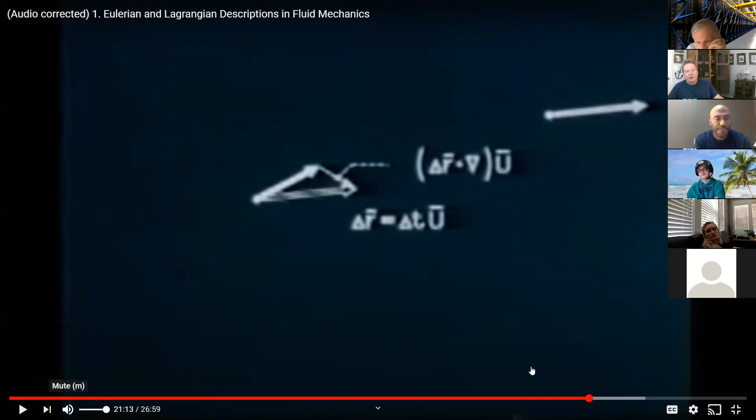But now, oh shoot. In order to - like, yeah, change that's about right. It was around like 2115 or something. Say that again, wasn't it like - I think it was like 2115, I believe. Something around there.

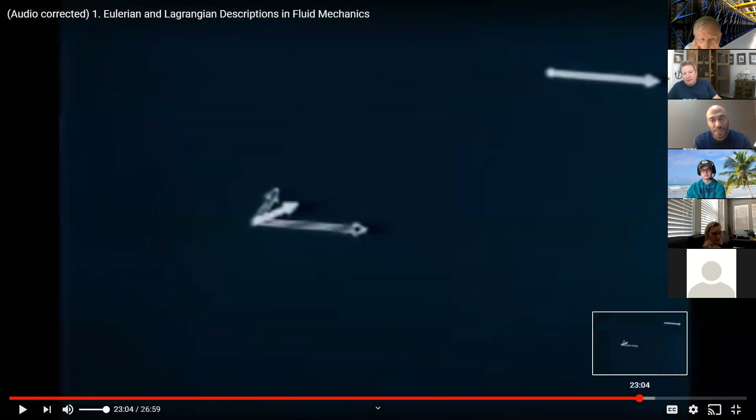Oh no, at this instant in time, as it does here... close enough. Eulerian vectors also change with time. Well, we'll just do it one more time.

Did I go too - am I too far ahead? Did I do this? No, I'm okay, yeah it's fine. No, it should have been here. Yep.

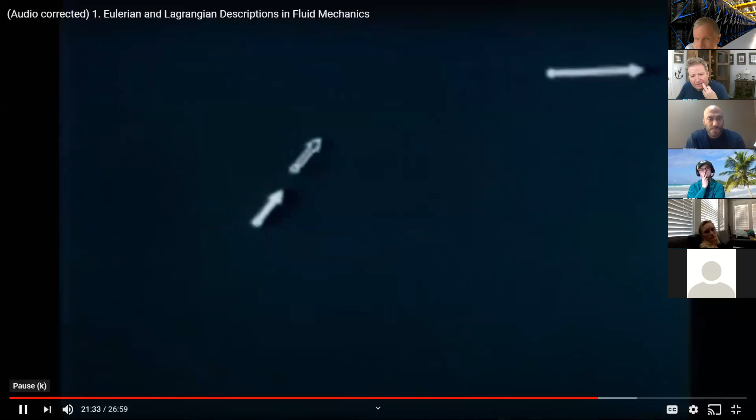Now, if the velocity of the entire flow changes with time, as it does here, the Eulerian vectors also change with time. So the first one, just like before, was a steady distribution, now we have a changing distribution. So we are accelerating at the laboratory points. See how this laboratory point is changing? So the moment the material point goes through the laboratory point, that's the same, but now the laboratory point is changing. So you're imposing accelerations, you're changing the streamline.

So now we have to go to a trajectory. It will be easier to see if, in addition to placing the Lagrangian vector at the left-hand point, we include as a dashed vector the initial value of the left-hand Eulerian vector.

So right there, what we're saying is this arrow. What's this arrow? The original trajectory, the initial velocity at the laboratory point.

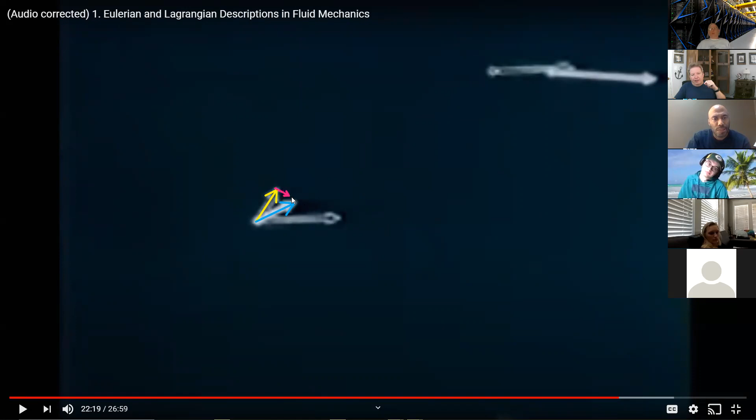This blue vector is the velocity later. So the difference from there to there is a result of what? That's a change in the velocity at a point over time.

Right, that's what that one would be. It's the local change. This vector is the total change. But this vector, oh, I'm running out of colors.

The pink plus the orange is going to be the green. So let's try that.

Now, when the material point has arrived at the right-hand laboratory point, the total change it has experienced is given by the difference between the dashed vector and the Lagrangian vector. But this can be broken into two parts.

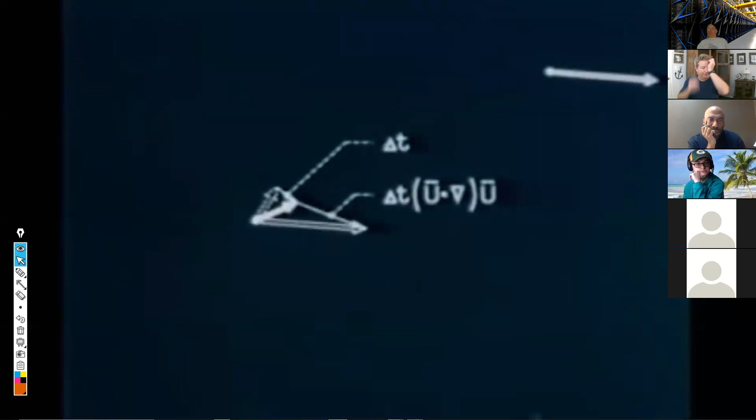The spatial velocity difference can be written, as before, as the time difference times the velocity times the gradient of the velocity. The temporal velocity difference can be written as the time difference times the rate of change with time at a laboratory point.

To find the total change, we must vectorially add the two effects. The material or substantial derivative is just the expression multiplying the time difference. This is the rate of change seen by the material point as it passes a laboratory point, written in laboratory coordinates.

Okay, so do you see that our way of drawing things this way, the acceleration, more simply written in a Lagrangian description, what we would draw, or the way that we would define this, is we would say that the change of a velocity vector over time, the total derivative, is equal to the local rate of change of the velocity vector over time plus the velocity dotted with the gradient of the velocity.

And the way that we might want to think about this is that we would do this.

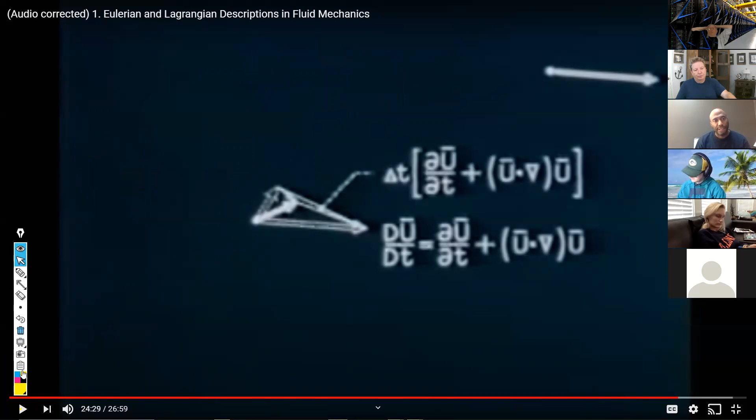Has been expressed in Eulerian notation.

To summarize what we have seen, we can tag the material points in a flow by using their locations at some reference time, and then give their displacement, velocity, and acceleration as functions of time and initial position. This is called a Lagrangian description.

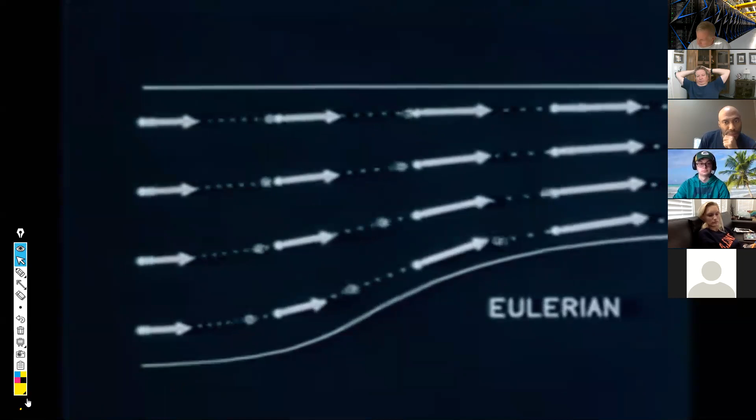Alternatively, we can define a coordinate system arbitrarily and probe to find the displacement, velocity, and acceleration at points fixed in that system. This is called an Eulerian description. This has the advantage that it is sometimes possible to find a system in which the flow is steady.

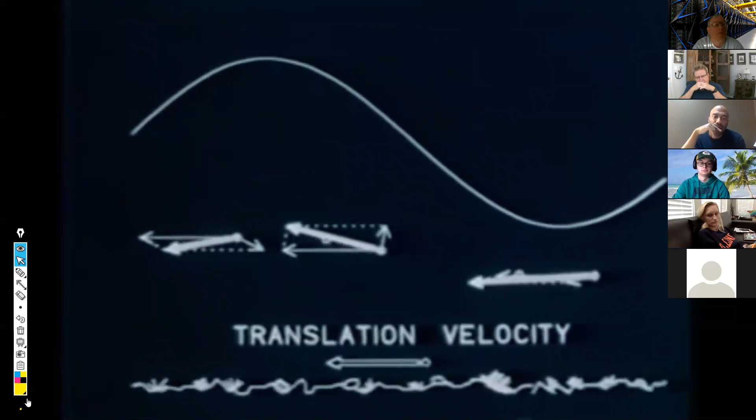It is also mathematically enormously more convenient. We nearly always write the conservation equations for a continuum in this Eulerian system. It has the disadvantage that we're not always referring to the same material point.

We can, however, transform from one system to the other by using the fact that displacement and velocity at a laboratory point is the displacement and velocity of the material point that happens to be there.

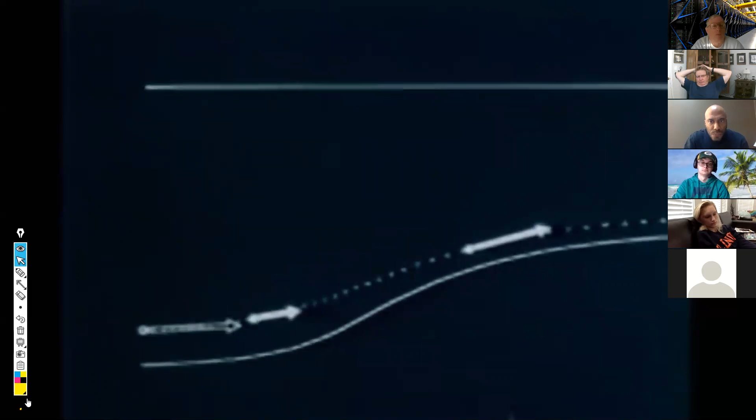To express in Eulerian field variables the change experienced by a material point, we must take account not only of the change with time of properties at a fixed point, but also of the change of properties with position at a fixed time.

Powerful mathematics, isn't it? And then I like that he does a description of this, and then it just ends. Do you agree that this would be so awesome if it were updated into current technologies where we could use colors and all sorts of stuff?

But it's good. I mean, this is a great, great video. And this is why there's so many people who actually want to do this.